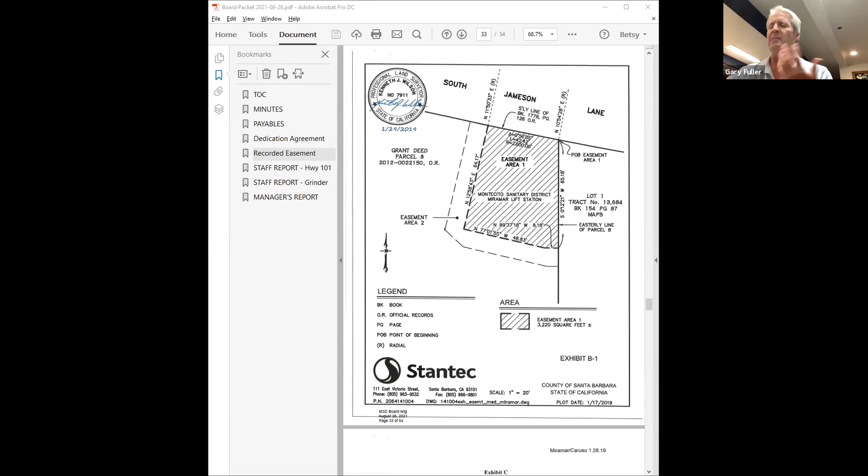I'm a little confused. When they submitted their permit, they obviously submitted all their flows. So I don't understand why they don't know what flows they're anticipating, that should have been submitted when we did this station, the lift station.

Now, via our past general manager that I know Woody takes exception with, she put us in a very strong position here. She made them put in what he stated. They wanted to put in a smaller lift station, but we said no, you need a bigger lift station. And he let it slip at the end of his conversation, Mr. Bryce I believe, that this is about money. They were forced to spend $6 million.

And if somebody else is going to use that lift station, they'd like them to pay for part of it. And I think that's really the long and short of this. Am I missing something? That I don't know.

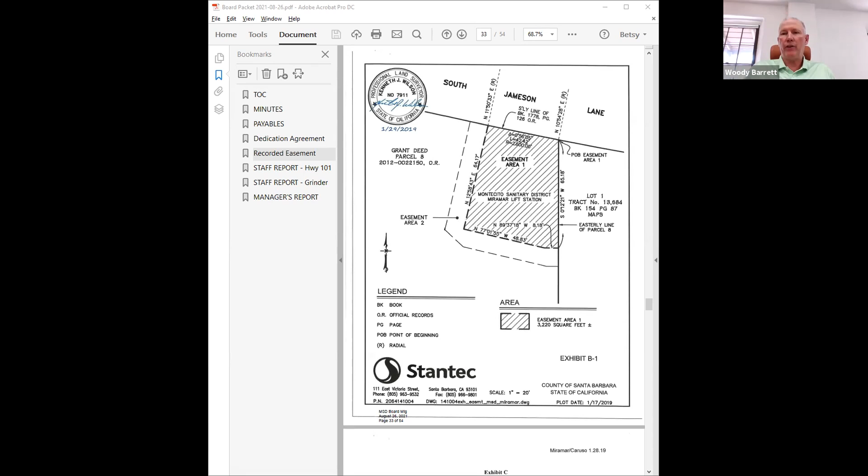Madam Chair, go ahead, Director Barrett, please. I didn't say they wanted to put in a smaller lift station, Director Fuller. There are prefab units that you can buy, and they were not allowed to do that. They had to construct this 3-story deep, massive, huge thing that's out there now. Oh, I'm sorry, my bad, but thank you for the clarification.

Okay, thank you all. Was there any other comments from the public before we go to Ms. Poytress? Any other public member like to speak?

Any raised hand? Madam President, it appears Bryce Ross has his hand. Yes, please. Thank you. Mr. Ross, Bryce, please. Hi, Bryce. Hello, Chair, I just wanted to clarify.

If it was misunderstood by Board Member Fuller that I was suggesting this was a conversation about money, while that may be one point that ultimately is to be looked at, that's not at all what I was suggesting whatsoever. What I was suggesting was we provided a basis of design, which at the time our engineer was suggesting the lift station should be designed based on his professional opinion of what the flows would be. Something different than that was constructed based on the district's engineer's suggestion, is my recollection.

And I just want to go back and look at it and understand exactly, is there capacity? Is the Miramar going to be served correctly? Just look at it holistically, because I don't think anyone's memory is exact looking back, but I think it's worth looking at. Thank you.

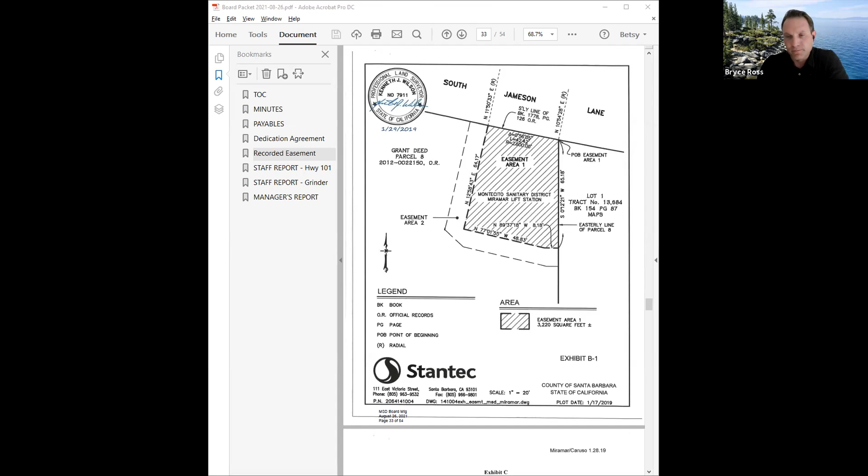I think that I do see a raise. Okay, Bob Hazard. Okay, thank you very much. Mr. Fuller, was there any other comment? No, thank you. Okay, thank you. So let's go ahead and move on.

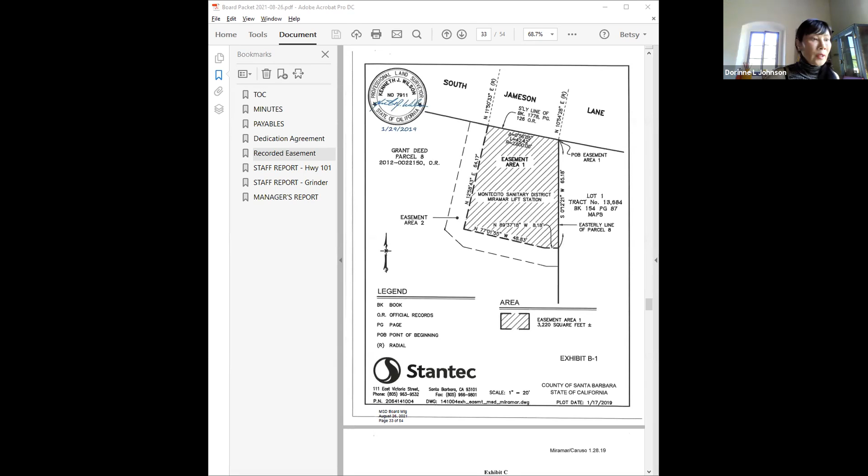We're going to go ahead and have Ms. Poytress go ahead. Poytress, can you go ahead and put your... Hello? Engineering Manager Poytress, would you like me to bring the staff report or the presentation on the screen? Everyone has the staff report, and I'll tell you what page that's on. You should all have the page number. I believe that's on page 40, Betsy? Yes, page 40.

Okay, is the staff report. Yeah, please go ahead, everyone. If you want to go ahead and follow, go ahead and turn to page 40, and we'll put that up on the screen for everyone else to see. And we all should have read it. There's some 3 alternatives that maybe we could pull up and go ahead. Ms. Poytress, are you there?

Yes, I'm here. I'd like to go over the staff report first. Okay, go ahead. We do have some time here, so go ahead, please, and we'll just go ahead and do that. Go ahead.

Thank you. So I just wanted to give a brief report on the progress of this project. Staff and Board President Johnson, as well as the Miramar Resort team, did meet on Thursday, July 29th to discuss the project. We are continuing to work with Flowers and Associates at this time, and staff has reviewed the draft Miramar Lift Station Pump Capacity Technical Memo that describes the flows and reiterates the KEH report that was provided to the district by Miramar of the flows that it was designed for. Then John Turner of Phoenix Civil Engineering used those KEH flows to design the lift station, and that is documented in that tech memo as well.

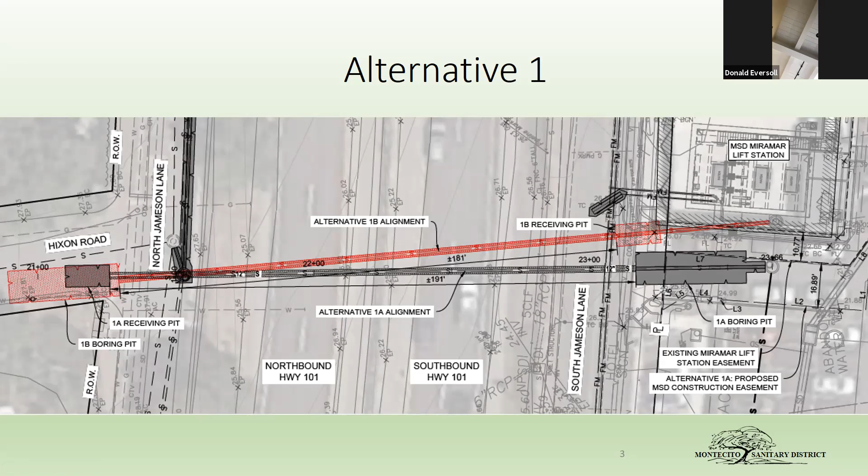And then for 1B, it's switched, because we would be going into a separate manhole. We are trying to limit how much of the boring pit would be within South Jameson Lane, which is a heavily traveled roadway. So we've swapped and put the receiving pit on the other side for those alternatives. Okay, thank you. Sure.

Alternative 2, please, Betsy. So alternative 2 was an alternative that was suggested by Miramar during our July 29th meeting.

So this is an alternative which goes from Hixon Road over to the HOA property, which is adjacent to the Miramar condo property. It's not the Miramar property itself, but we have not yet contacted this HOA property to verify if this is something they'd be willing to do. This is a proposed alternative so that we would have less impact to the Miramar.

The boring pit would be within Hixon Road, which is of greater impact to Hixon. The receiving pit would be within the HOA property. We would need to add another manhole onto the HOA property to make that right-hand turn, and then construct a pipeline more or less underneath or through our concrete and lift station that we have now. I'll go over the pros and cons shortly, but this is the layout for alternative 2, which was suggested by Miramar.

Carrie, would you explain what a boring pit and a receiving pit are, please? So in order to get across Highway 101 without open trenching, which is what you normally see where you dig down, put the pipe at the bottom, and backfill it with dirt, we can't do that, because they have to keep the roadway open and traffic moving. So we're using a jack and bore method.

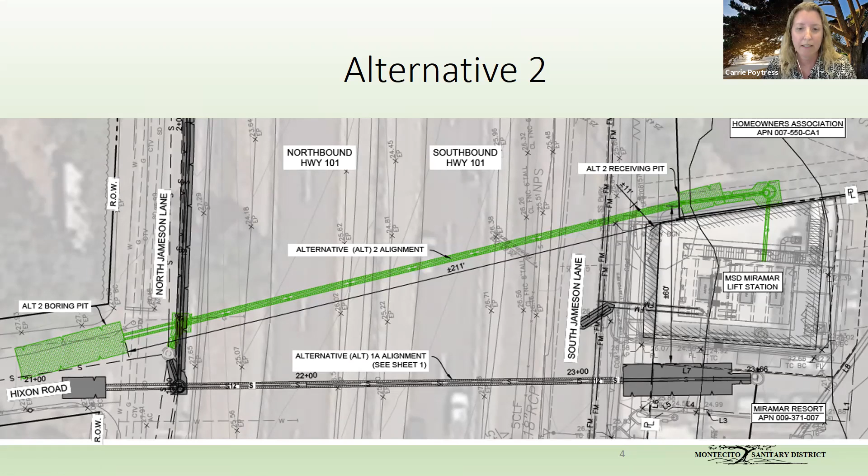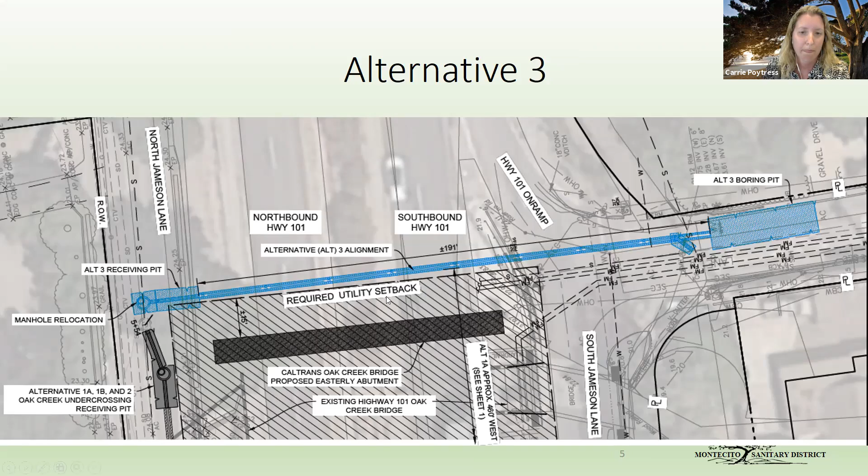These proposed alternatives all have what we call opportunities and challenges. I'll go down each alternative and go over the opportunities and challenges, and try to answer any questions you have with each alternative.

So alternative 1 — excuse me, Ms. Poytress, do we have that in our packet? Yes. You have a shortened version of it, within the staff report, looking only at alternative 2 and alternative 3. Yeah, it would be nice if we had that in our packet. Yes, we were still working on this when the packet was distributed last week, so this can be distributed to the full board after this meeting. Yeah, it'd be nice if I could have it before the meeting, even just like an hour before. Thank you.

So alternative one is the 12-inch sewer main at Hixon Road entering the Miramar lift station from the resort side on the west. The opportunity is that flow is redirected from the Posilipo lift station, minimizing low flow and odor issues at the Miramar lift station. Construction at Hixon Road is within the county right-of-way, and work on the south side of Highway 101 is off of South Jameson roadway. The challenge is that this alternative requires real property acquisition for a new permanent easement in the Miramar parcel, and acquisition of the manhole we would connect to, the Miramar manhole located in the secondary valet driveway. This challenge has both a cost and a schedule impact, as noted in the parentheses.

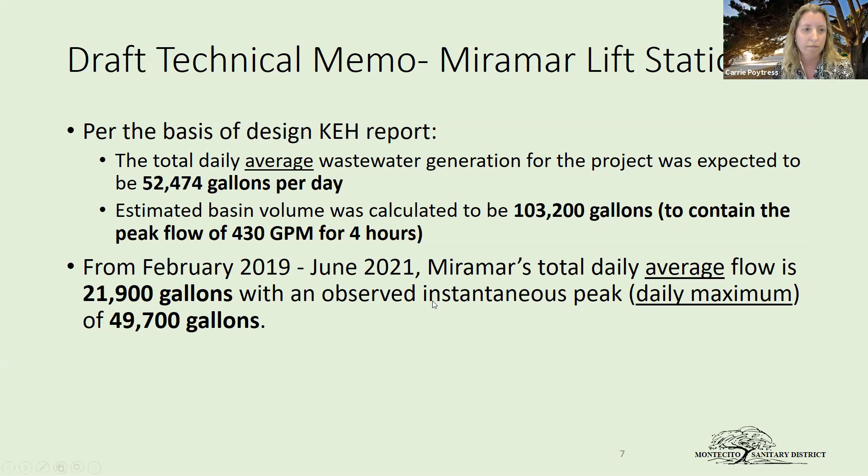And Betsy, I think that might be the last of the slides. Okay. Yep. Thank you very much.

This is the type of thing that is so important that we have this in our packet before the presentation, because I don't think I will allow this to happen again unless we have the information. Even if it was the day before, we would have to have a special meeting or change the date of this. Okay, so it looks like all of them are going to impact, I guess, the Miramar.

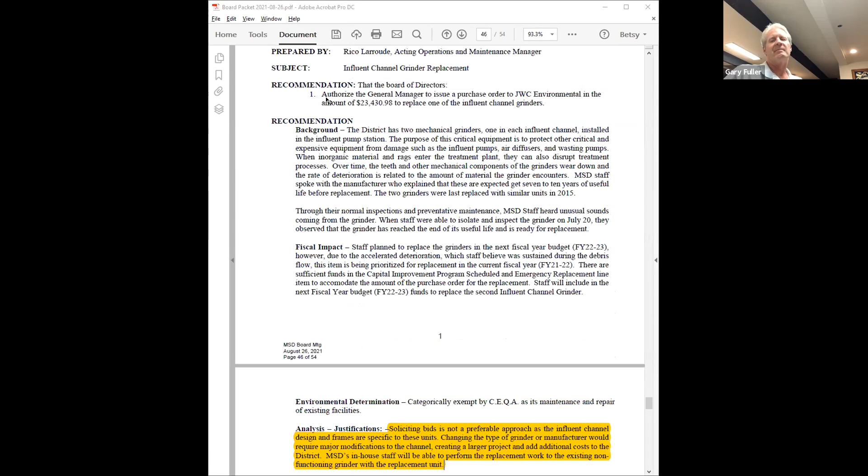This piece of equipment slips right into two slots in a channel that feeds the influent pumps, so there really is only one vendor that will fit our current configuration. Making any changes to that at this juncture would create a bigger project for us, so we wanted to move forward. Okay, thank you for that answer. Yep, good question, but thank you very much for the answer too.

Okay, let's go ahead and take roll call. Director Barrett, aye. Director Eversole, aye. Director Fuller, aye. Director Newquist, aye. Director Johnson, aye. Motion passes. Thank you, thank you, so let's go ahead and move on.

There's no committee reports as of today. We're going to go into district operations and maintenance. We're going to have a lot of committee reports next time. District operations and maintenance, information items. The general manager will provide information, non-actionable updates. So we'll go ahead and do that quickly, Brad.

Thank you, President. As you may recall from our last meeting, I was reporting live from the California Association of Sanitation Agencies conference down in San Diego.

I received a great update on some future legislative actions as they pertain to the American Rescue Plan Act. One of my takeaways from that conference was I noticed there were other board members there, so this time next year, hopefully we can have one of our board members attend to help represent the district with me.

I also wanted to let the board know that we are in the process of executing the enhanced recycled water feasibility study contract with Carollo. It's in their hands right now, and hopefully we'll be getting word that they've executed their end, and then it can come back to the board or our team to sign and fully execute it. So Nick Turner at Montecito Water and I are very excited to have probably a kickoff meeting come September. Future updates to come soon.